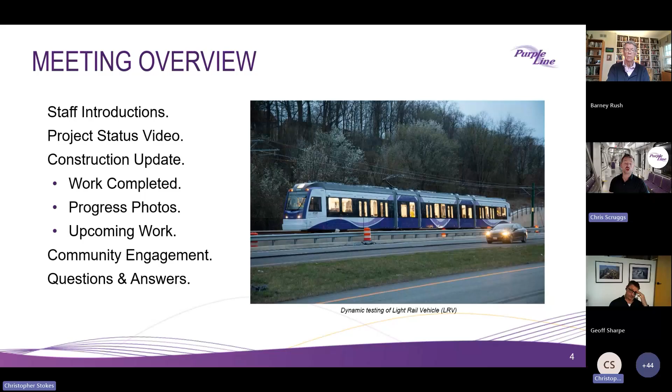So tonight we'll be joined by Ray Biggs II, our Senior Project Director for the Maryland Transit Administration, Doran Basso, the CEO of the Purple Line Transit Partners, Hugo Fontaroche, the Project Executive for Maryland Transit Solutions, the project's builder, Luis Rivera, the General Manager of Purple Line Transit Operators, myself, Chris Scruggs, Community Outreach Manager, and Scott Glass, the MTS Construction Manager Lead.

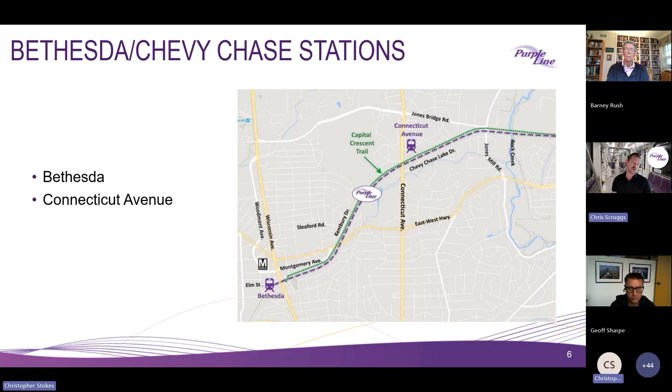This slide discusses the two stations we'll be talking about tonight, which will be the Bethesda station, the westernmost terminus of the alignment, and the Connecticut Avenue station. And with that, I will pass this over to Ray for a little introduction.

Welcome, everyone, and thank you again for joining us this evening for the CAT meeting. The momentum in 2024 on the Purple Line has evolved into the transformation you just saw in the photos shown before the meeting started, so hopefully you got to see those, from 2024 to 2025. Tonight you will see our 2025 spring progress video, including footage highlighting some of the transformational progress across the 16-mile Purple Line alignment. So Chris, Catherine, let's play the video, please.

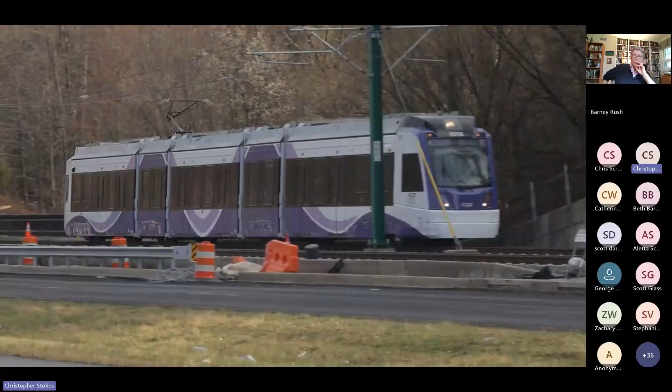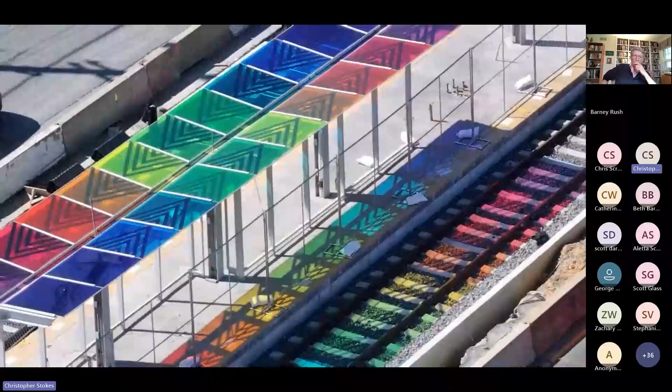Overall, the project is more than 76% complete. Now let's take a look at some of the transformations across the alignment over the past year.

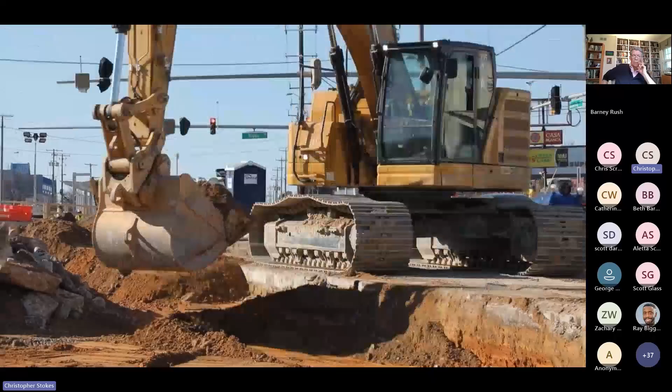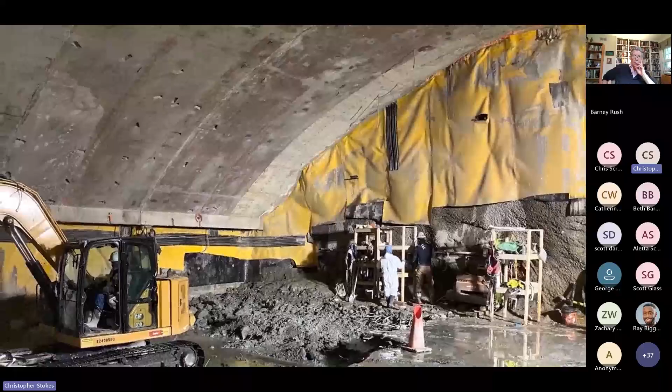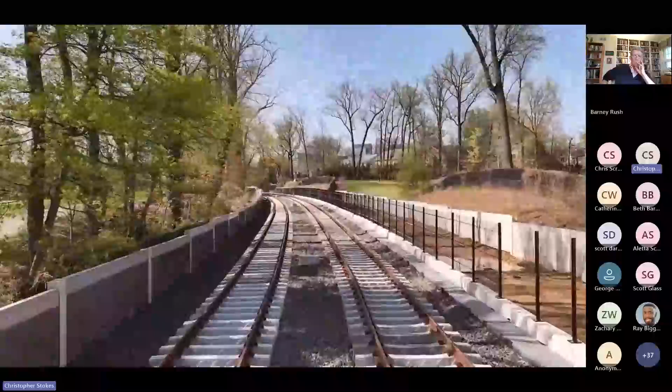In Bethesda, we have gone from a rocky shaft to a concrete cavern, which will one day soon allow commuters easy access to the Metro's Red Line. In Chevy Chase, the Connecticut Avenue station is awash with color as the station continues to progress and have a transformative effect on the community around it.

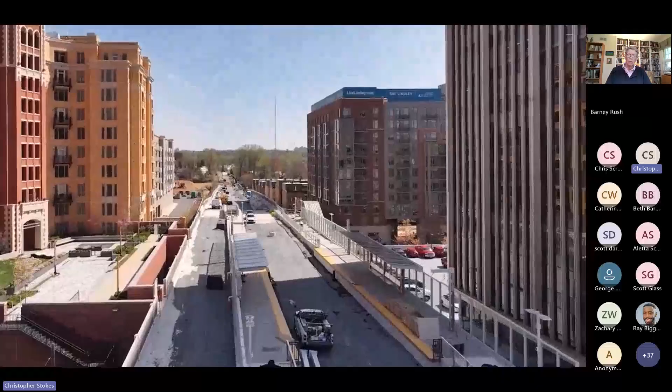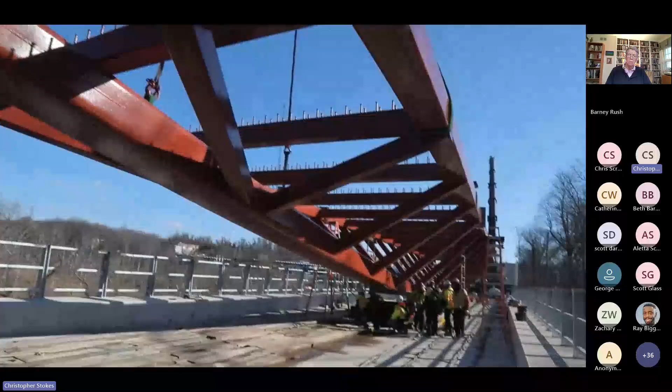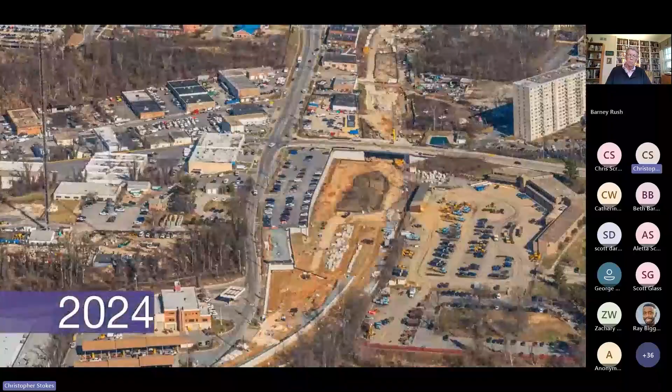Over Rock Creek Park, there is a new Capital Crescent Trail Bridge. This unique inverted truss bridge will be an iconic part of connecting the communities and the Rock Creek Trail system. The Lyttonsville Operations and Maintenance Facility and the Lyttonsville Station buildings can now be seen. The next transformation will be the installation of the many tracks in the yard.

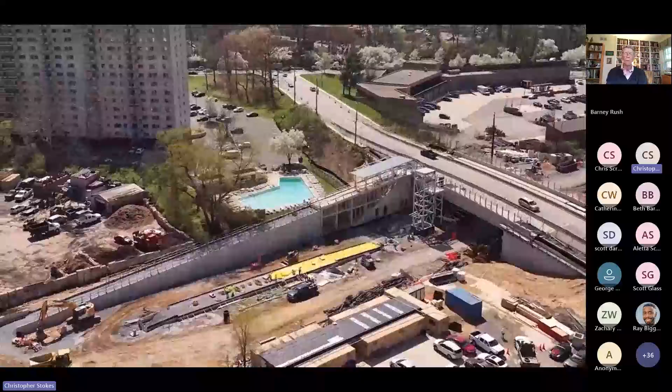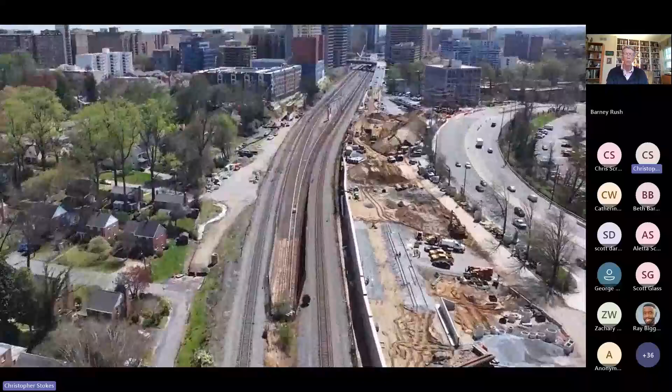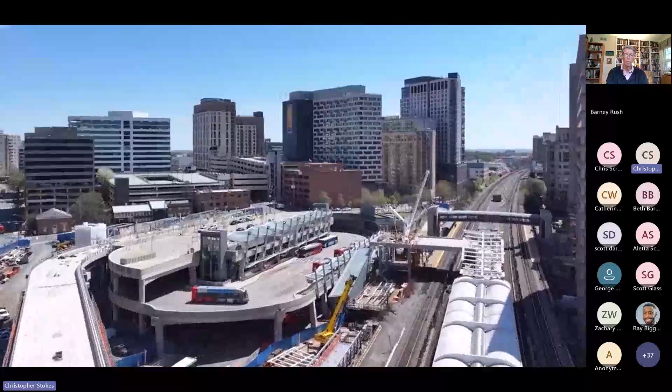Over in Silver Spring, the 16th Street station is now under construction, making all 21 stations now under construction. The Silver Spring Transit Center is being transformed into an even more important connection point as crews construct stairs and elevator connections to the nearly complete Purple Line station. Crews have also completed the challenging structural work for the new mezzanine over the Metro and CSX tracks.

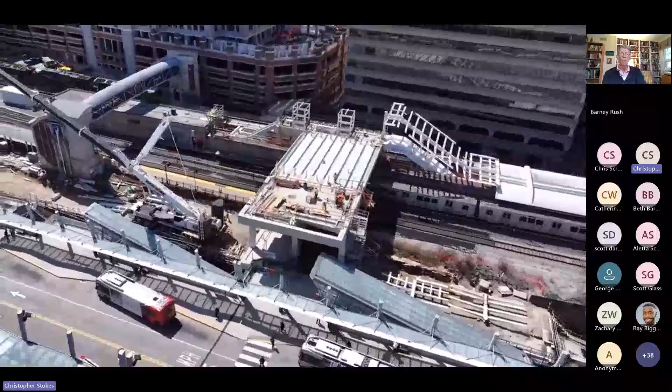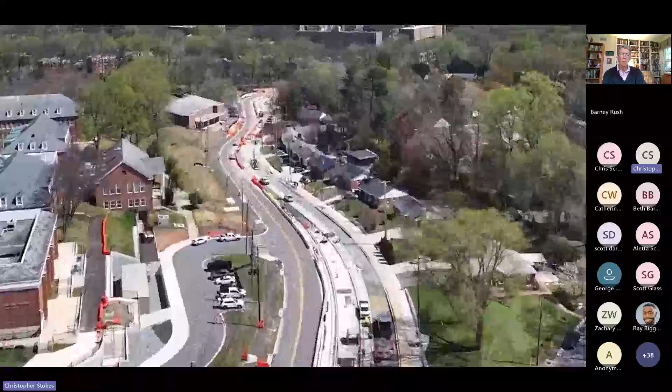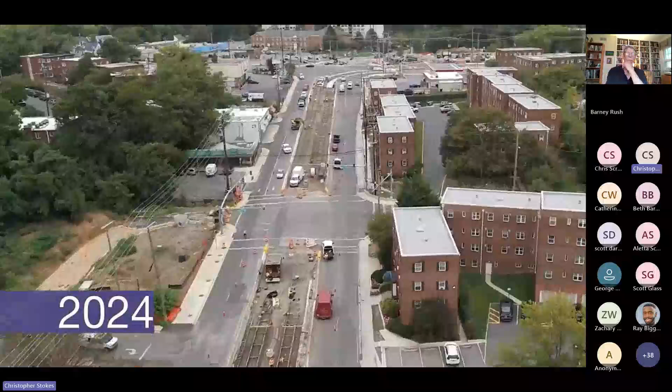Just outside of downtown Silver Spring, Wayne Avenue has more tracks, sidewalks, and curbs. Traffic has been moved onto the newly completed half of the Sligo Creek Bridge, and trail access has been improved. Piney Branch Road has been totally transformed, with tracks embedded in the roadway and curbs and sidewalks along the entire length.

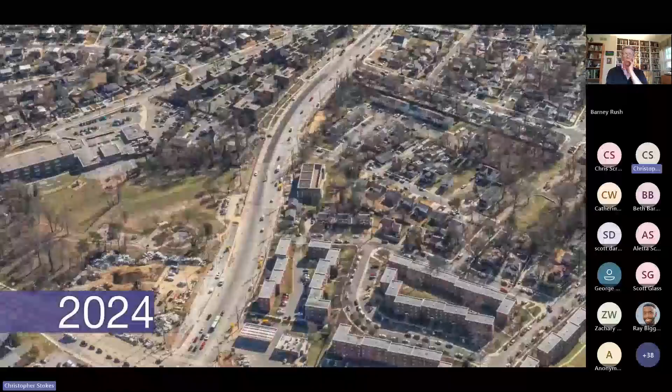University Boulevard has seen a tremendous transformation as crews complete over 95% of the curbs and sidewalks and have installed miles of tracks, including completing the most challenging crossings at Carroll Avenue, Riggs Road, and New Hampshire Avenue.

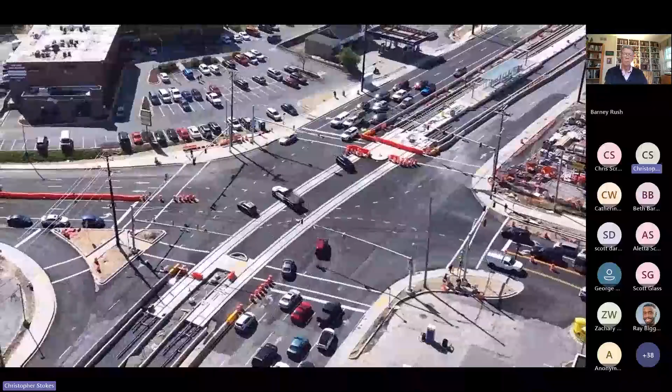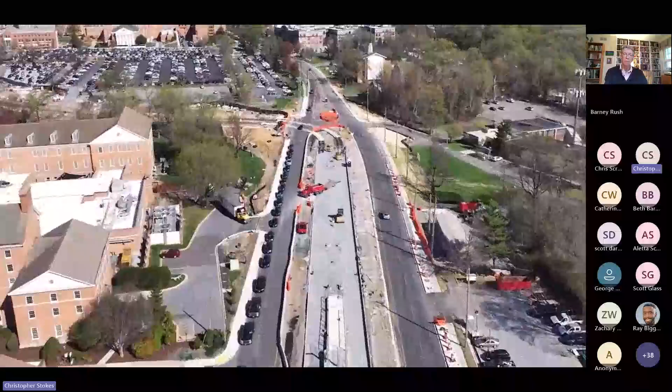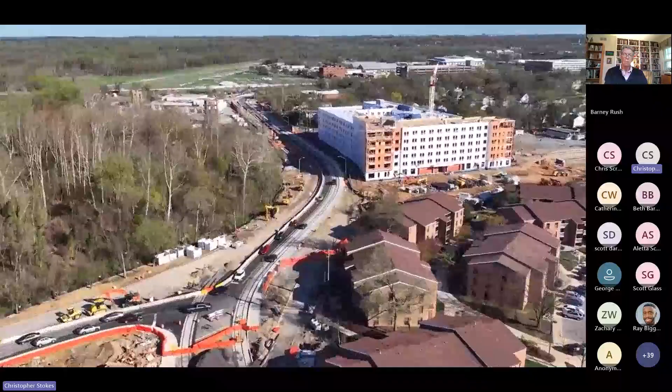At the UMD campus, tracks are installed across Adelphi Road, and most of the campus has catenary poles installed, and now prepares for system integration. Campus Drive, to the east of campus, now has the first pair of tracks installed, and drivers have been shifted to allow the final phases of restoration.

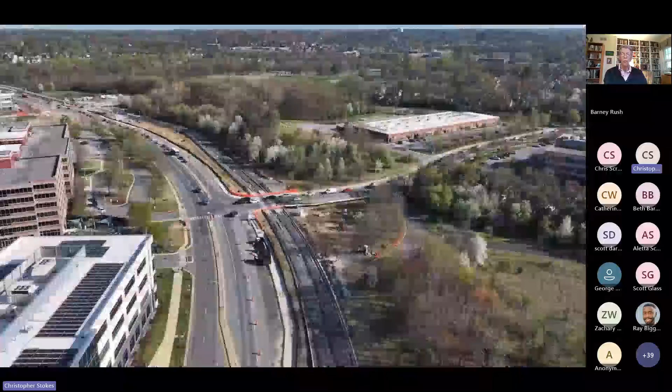Along River Road, stations, tracks, and even fencing have been installed. Kenilworth Avenue has also seen a major transformation as curbs, sidewalks, and driveways have been completed, allowing the track work to commence in the middle of the roadway.

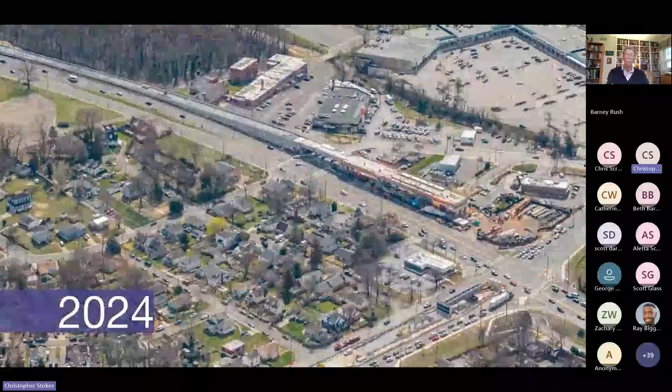The flyover at Kenilworth Avenue and East-West Highway and the elevated station continue to impress. The access stairs and elevators are underway, and the station's clear windscreens are ready for riders.

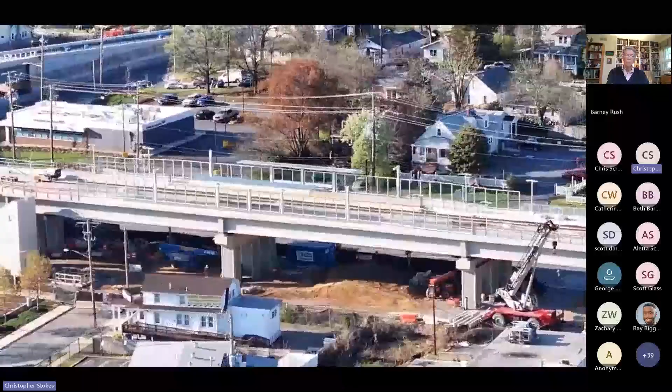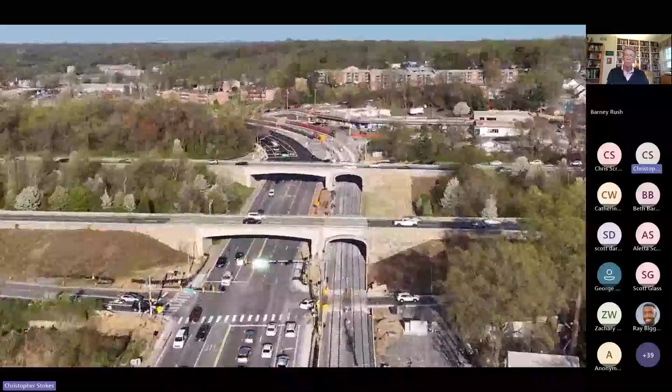Along Riverdale Road, new street connections, ballast, and tracks can be seen making tremendous progress. Specialty crews have completed the beautiful stonework on the Baltimore-Washington Parkway bridges, and the Beacon Heights station is largely complete.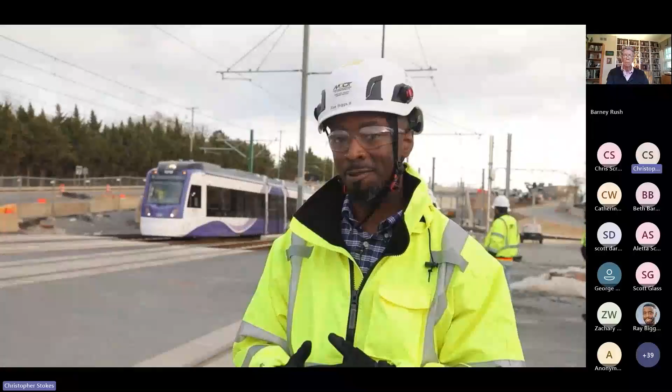In case you didn't hear, we have started dynamic testing of our LRV light rails. Along Veterans Highway, the new test track is powered up, an amazing milestone, as this area has been transformed into an active train line where the new light rail vehicles can be tested, operators can be trained, and the complex operation systems can be vetted.

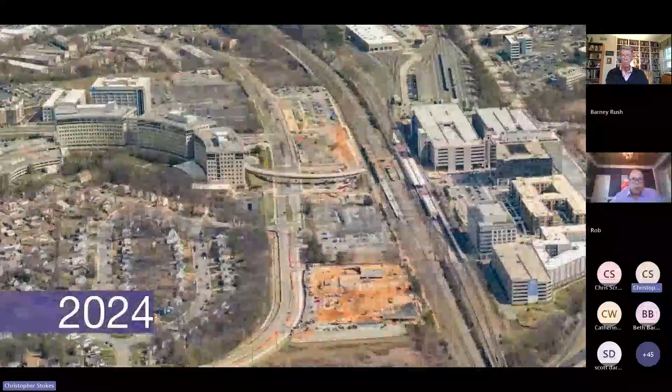Tracks continue all the way to New Carrollton, as the east end of the alignment builds new connections to this important transportation hub. Connecting metro stations and the communities across the alignment is one of the Purple Line's main goals. Soon you will see the state-of-the-art systems being installed across both counties, carrying the operational and communication systems for the LRV. Stay tuned for a lot more transformations coming very soon.

All right, so here you can see the timeline graphic with some of our upcoming major milestones, including our winter 2027 revenue service availability date.

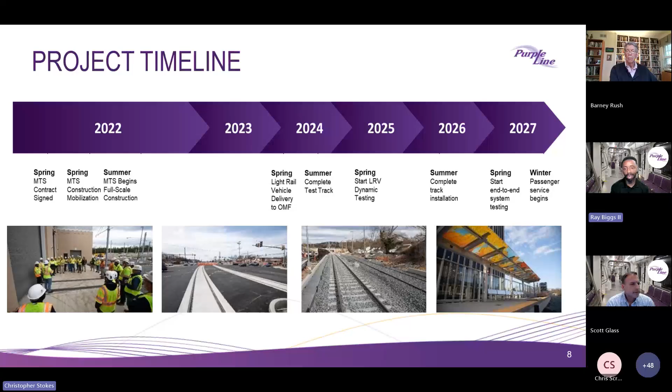To start, in downtown Bethesda, where we have the Bethesda Station South entrance connection with the Purple Line Bethesda Station, in the bottom of our excavation we are continuing the rock excavation. You can see in the photo here that we've now completed the concrete roof of the cavern and the main cavern concrete arch ceiling. We've begun the process of excavating the lower portion of the station and the cavern towards the bottom of the excavation.

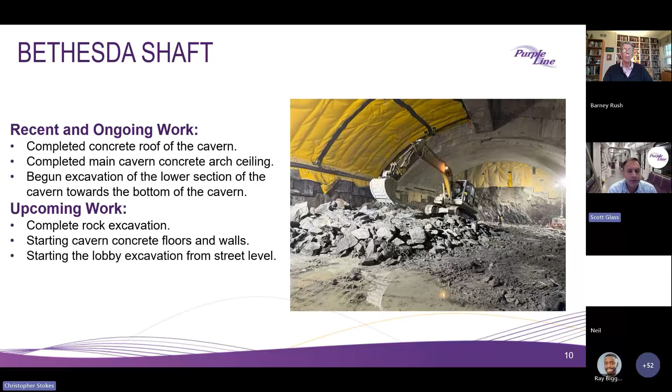We make great progress every week, and right now we expect to be through this stage of the work by mid-June. Upcoming work in this area will complete the rock excavation, and we'll continue to start the concrete work, starting the cavern concrete floorings and walls, and then we'll also be starting the lobby excavation from the street level. Next slide, please.

In the Woodmont Plaza area at the Bethesda Purple Line Station, we've been continuing the electrical and mechanical systems and plumbing systems inside the station. We have now had the stairs and escalator access to the street level completed, and we've been continuing preparations for track installation with the concrete track slabs through this underground portion of the alignment.

We've begun the construction on the elevator head house at the plaza level, and we've also begun the installation of the elevators and the elevator machinery. We've also begun installation of all the station finishes.

Upcoming work in this area will be finishing up on all of the mechanical systems installation and the ceiling finishes. We're closing in the ceilings right now with the final ceilings, and we'll be installing the electrical switchgear and the Pepco power feeder to the station. And then lastly, we have the retaining walls in this photo you see here that'll be completed in the next 2 to 3 months, which will complete the very west limits of the Purple Line track alignment. Next slide, please.

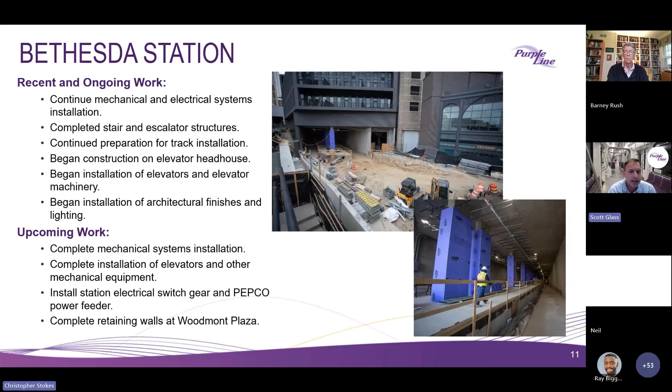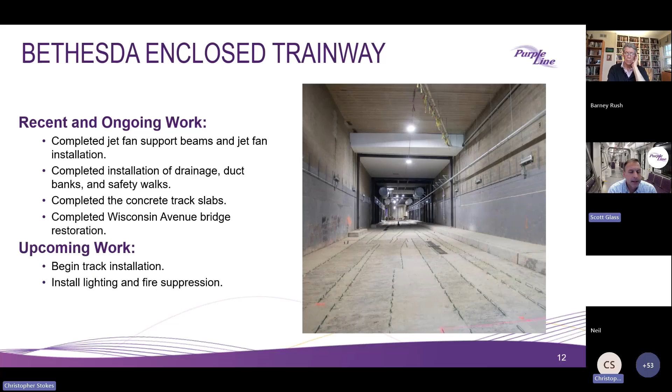This is a photo inside the Bethesda enclosed trainway underneath Wisconsin Avenue in the commercial building areas. We've completed the jet fan support beams and jet fan installation, and all of the drainage installation down through this track alignment corridor, duct banks and safety walks. We've now got the track slab completed down through this entire corridor, ready for track installation. And we've completed the painting of the bridge and the bridge restoration underneath Wisconsin Avenue. Over the next months, we'll be installing track down through this area and finalizing all of the lighting and fire suppression through this trainway.

Where we daylight at Pearl Street and Elm Street, we've completed the ramp connections to the Elm Street pedestrian bridge. We've completed the paving of the Capital Crescent Trail from Elm Street up to the Lynn Drive access to the project, and we've been continuing installation of railings and fencing on the walkways down through this corridor. Upcoming in this section, we'll be finishing up on the trail lighting along this area and final fencing installations. And we soon will have the remainder of the rail that has not been installed down through this area installed, as well as start the installation of the overhead catenary poles.

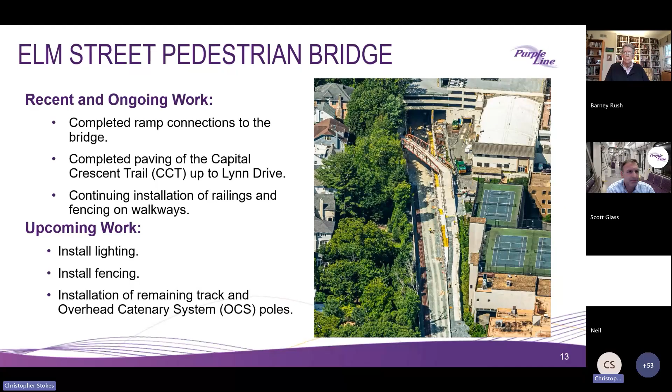From Pearl Street up to the Connecticut Avenue area, we have completed all of the retaining wall construction. We've continued the trail connection at East-West Highway. We've completed final grading and ballast curb installations through this area and continued this track installation. Very soon, in the coming days, we'll be completing the track installation at the Connecticut Avenue bridge. And following right behind that, we will close all of the ballasted track gaps between Connecticut Avenue and the BET, which is the Bethesda enclosed trainway at Pearl Street. We will be continuing and completing the work on the CCT trail through this corridor, and we'll also complete the trail connections at East-West Highway, Kentbury Way, and Landmark Court. Then there is some miscellaneous small remaining retaining wall fencing to complete, as well as all of the catenary poles that will be installed through this area.

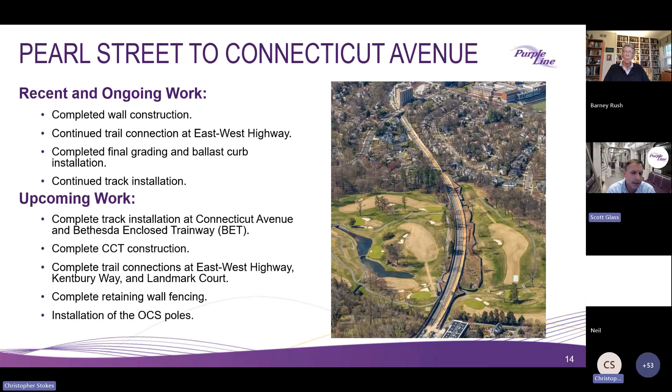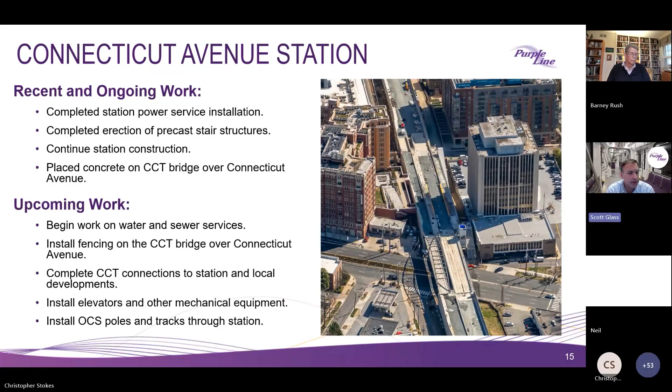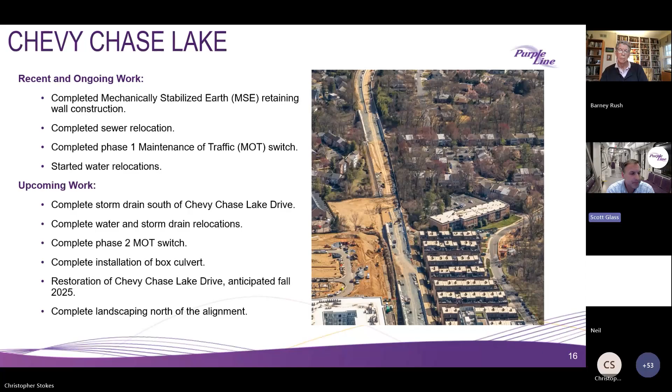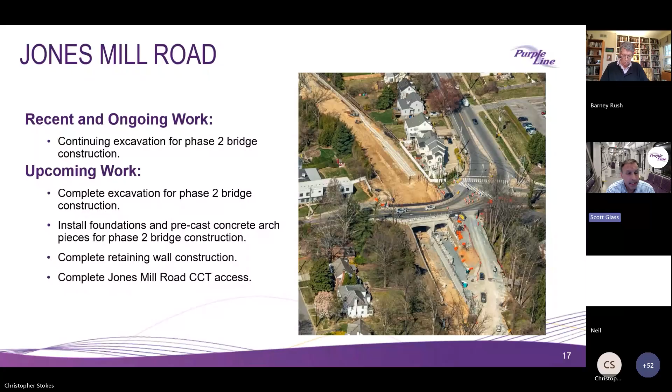This will be an access point we use for the project through the fall, one of the limited locations for access to install track and OCS poles from Connecticut Avenue all the way down through Rock Creek.

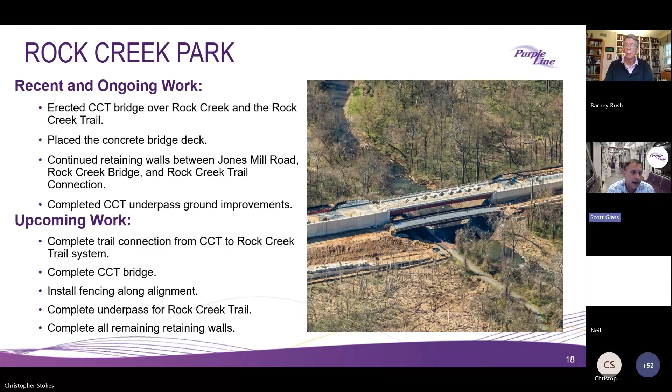With that, I'm going to hand it off - I think it's Doran who's going to walk us through this section. Actually, Scott, I'm pinch hitting for Doran tonight. Sorry, hi everyone, John Undeland. Hi folks, I'm John Undeland with Purple Line Transit Partners. Doran had a conflict this evening and regrets not being able to be here with you tonight.

As the confetti on the slide indicates, we recently achieved a very exciting and significant milestone. Purple Line light rail vehicles, LRVs for short, are now moving on a test track powered by the overhead catenary system. We call this dynamic testing.

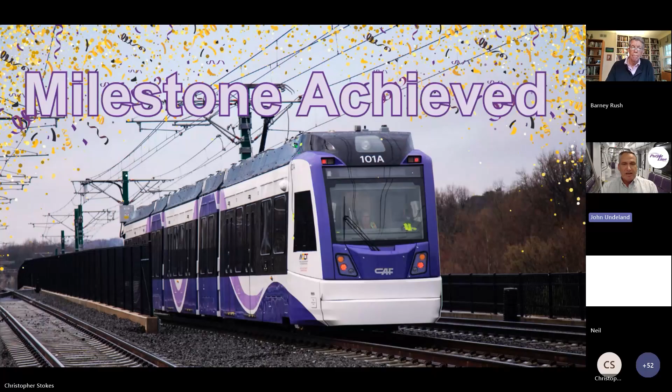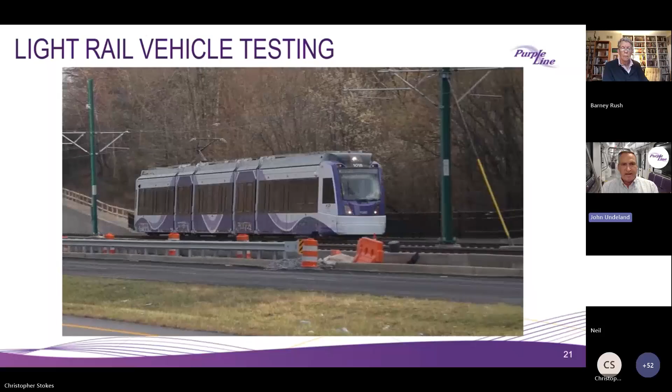A video can tell the story a lot better than me, so let's check it out. We seem to be having a sound issue here, but you're seeing the LRV running up and down the tracks.

What you just got was a sneak peek. Let me give you the play-by-play of what you were watching. We have our LRVs going up and down that one mile track over by our operation and maintenance facility. You see the still shot there, and the lit building behind that is our major operation and maintenance facility.

On the other end of the project, close to the Prince George's County terminus, we're currently not crossing any roads, sidewalks, or public access areas. The test track is fenced, and we've taken a number of safety precautions, including posting a large number of no trespassing and other signs. If you find yourself in that neck of the woods, please do not go near the moving trains.

Be aware that the overhead power wires are now live and carry quite a lot of electricity. We just want to make sure we're educating the public on LRV safety as we get nearer to expanding our testing onto public roads, and ultimately to operating trains with passengers on board, hopefully including every one of you, in late 2027.

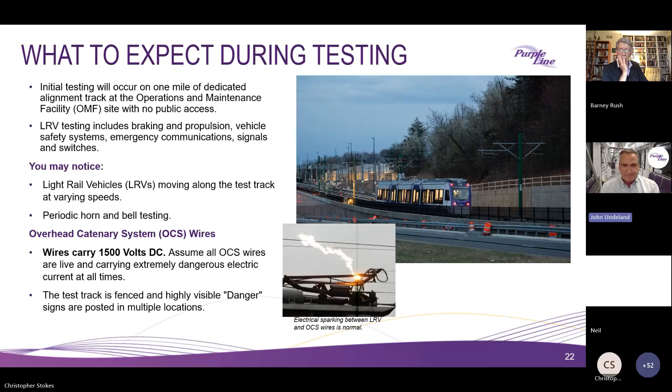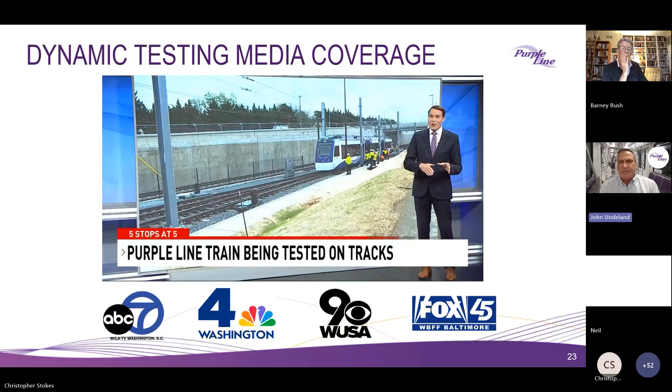This milestone made a splash in the news. ABC 7, Fox, the local TV stations, and WUSA covered it - you may have seen it there first. And with that, I'm going to turn it back over to Carla to talk more about community engagement.

Thanks, John. I'm going to take these community engagement slides. Very much appreciated. Next slide, please.

The team presents at school PTSA meetings throughout the year, sharing construction area updates and safety tips. Please visit purplelinemd.com for a full list of our event calendar.